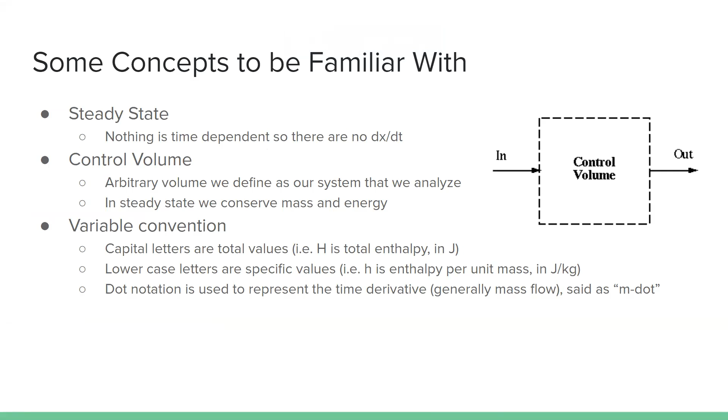The first concept that comes up often is the idea of steady state. Basically, it means nothing is dependent on time; there are no time derivatives of anything. In our rocket engine case, the amount of mass flowing in is the same as the amount flowing out, with no buildup of mass. Same thing with energy: energy flowing in equals energy flowing out, although it will be flowing out in different forms, so you don't have any buildup of energy inside your system. That's basically steady state.

Another big concept used a lot is the idea of a control volume. I don't know if you've heard of systems versus surroundings, that's a big concept in thermodynamics. Basically, you have a system you're analyzing, and we draw an arbitrary volume around it, and everything inside that volume is your system. Everything outside is the surroundings. Anything that crosses that control volume boundary we analyze as mass flowing into or out of the system, energy flowing into or out of the system, that kind of stuff.

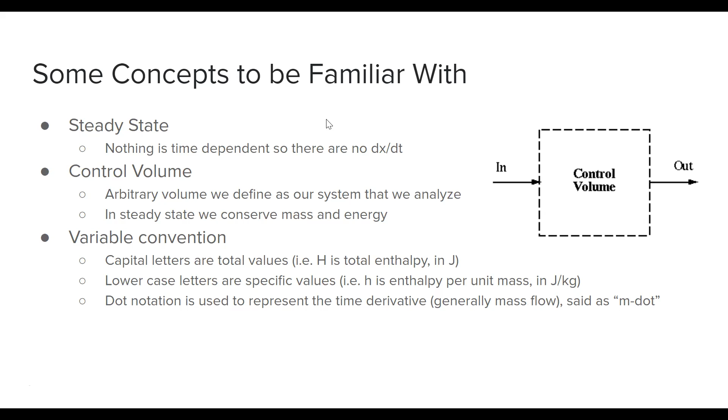And now just some variables that we're going to use throughout this. I'll go through these pretty quick since a lot of them you'll probably already be familiar with.

T is temperature, in most cases using Kelvin. P, capital or lowercase, is pressure. This is one case where specific versus total doesn't really matter - pressure is pressure.

Lowercase cursive v is specific volume. I don't know if you've seen this before - it's basically the inverse of density, where density is mass per unit volume. Specific volume is volume per unit mass, 1 over the density. This is generally used with gases instead of density for some reason.

Rho, which kind of looks like a P in its variable form, is density - again, mass per unit volume.

Gamma, or K, is the specific heat ratio. We'll get into more exactly what that is later. Hopefully everyone has seen this before in the CEA results - specific heat ratio is there in CEA, and CEA calls it gamma. Some textbooks call it K.

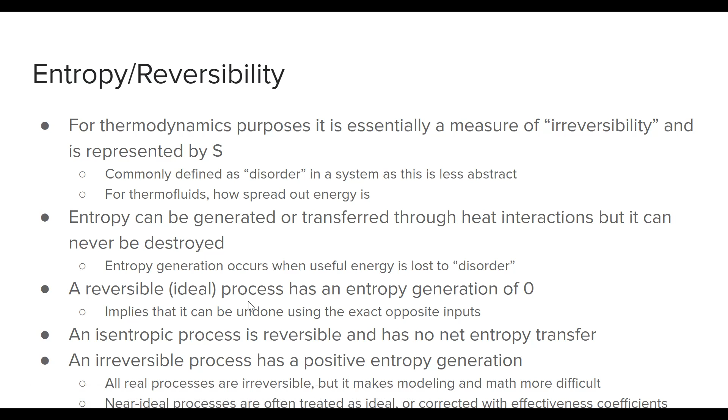In our example of rocket engines, or even just any kind of flow, if you put it through a converging nozzle and then a diffuser - forget the whole rocket engine that accelerates everything, think of it just like water going through a converging and then diverging nozzle. It's not going to be supersonic, but what happens is in the converging section, the water speeds up and its pressure drops, remember Bernoulli's principle, and then when you put it through the diffuser, the diverging section, it slows down and pressure increases. In a reversible process, that pressure will return exactly the same, the velocity will be exactly the same as it was at the inlet. None of that energy is lost to disorder.

I'm going to come back to the isentropic process - let me talk about an irreversible process first. An irreversible process has entropy generation - some of its energy is lost to quote unquote disorder. Visualizing that again with the nozzle and the water, it would be like if you put it through the converging section and accelerate the water, and then put it through a diverging section that's exactly the same, except this time it doesn't return to the exact same pressure or the exact same velocity.

It's a little bit lower in pressure and has a little bit less velocity. The energy has decreased because some of it has been lost to entropy, or disorder, however you want to imagine entropy. So that's just an irreversible process. There is no way we can destroy, quote unquote, the energy or the entropy that's been created. There's no way to go back to that original state unless you do outside work on it.

So with that, an isentropic process is one that is both reversible and has no entropy transfer. That means in an isentropic process, the entropy stays the same. There's no entropy generated and none transferred into or out of the system. These two are kind of like a square is a rectangle, but a rectangle isn't necessarily a square.

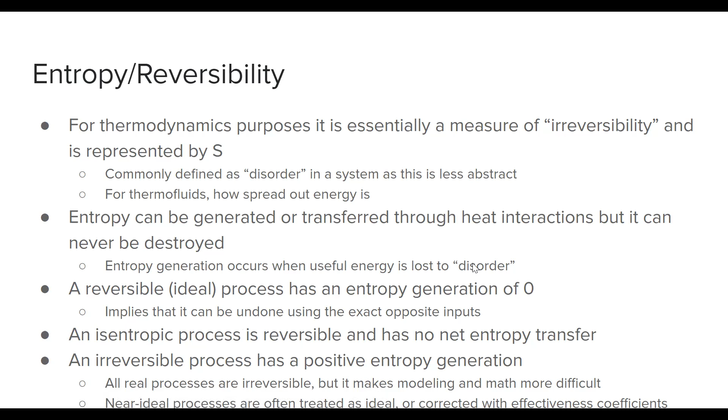We'll get to how that relates to rocket engines later. So, specific heats - I'm sure most of you are familiar with the term specific heat capacity, the variable C. When you're dealing with solids and liquids, that's one value. Specific heat capacity relates the energy with the temperature.

For gases, that concept gets a little bit more complicated. There are two different specific heats: CP, specific heat at constant pressure, and CV, specific heat at constant specific volume. They are kind of as it's implied - CP relates the energy and temperature if you're heating it at a constant pressure and allowing it to expand. CV is the same thing, relating temperature and energy while heating up a gas at a constant volume without allowing it to expand.

So if you remember from the ideal gas law, this would mean the pressure would increase even while the volume stays the same. More specifically - that you don't really need to know, just kind of interesting - oh, I think I skipped a slide. I did skip a slide. We'll just talk about that next.

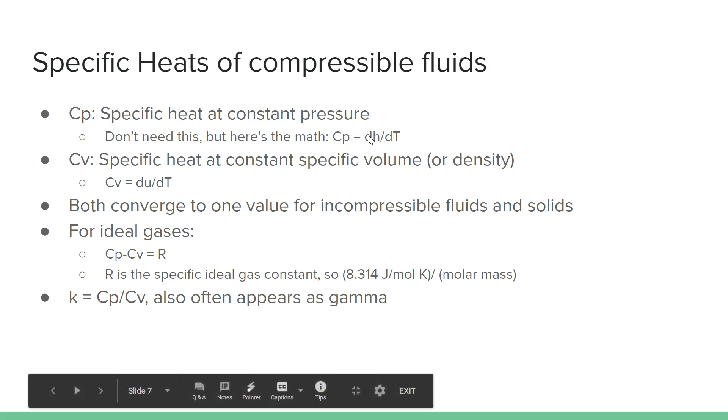So now I'm going to go back to the slide where we talk about the difference between enthalpy and internal energy, because those are very similar and it can be kind of confusing. Internal energy, as it implies, is the amount of energy that's contained in a system. Now that amount of energy is fairly arbitrary - we have to define that relative to a reference state.

That reference could be anything you want realistically, but most commonly you'll see it referenced to 0 degrees Celsius or 0 Kelvin. 0 Kelvin is more ideal because if you reference 0 Celsius and you have something below that, you can actually have a negative energy, which is kind of weird to think about. But energy is just defined relative to a reference state, so it is possible. 0 Kelvin is absolute zero, which means if your reference state is 0 Kelvin, energy is zero, and you cannot have any negative energy there because absolute zero temperature also corresponds to absolute zero energy.

So enthalpy is a slightly different way of measuring the energy in a system. It's defined as internal energy U plus PV. Remember, I said earlier that in thermodynamics we define work not as force times distance, but as pressure times change in volume, which if you think about it is fairly similar. Pressure is force per unit area, and volume is kind of just like distance times area, if that makes sense.

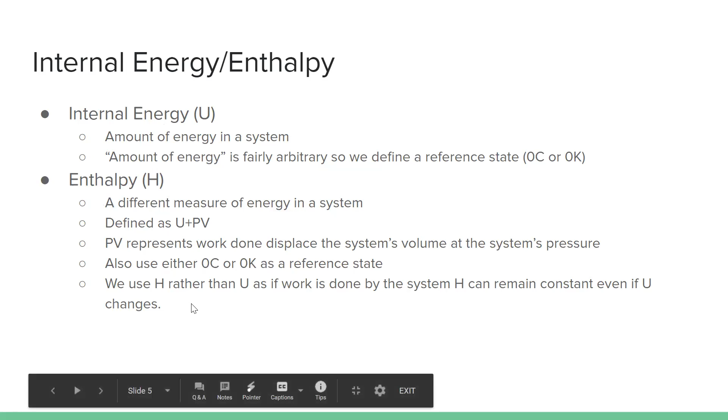All right, I think that's it for the kind of background on thermo slides. And now we can actually get into how this relates to rocket engines.

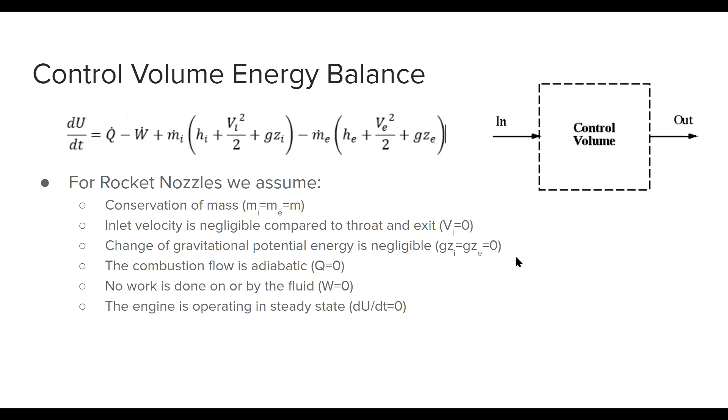So we can arrange this to say that H1, H inlet, minus H2, H outlet, equals the kinetic energy term at the exit. So basically what this means is enthalpy in minus enthalpy out is the kinetic energy of the exhaust gases.

Basically, the rocket engine takes the large amount of enthalpy from combustion gases and turns that into a large amount of kinetic energy of the exhaust. And that is the main function of the rocket engine.

We want to maximize this term and minimize this term. And from the combustion side of things, we want this term to be as high as possible. Yeah, so that's basically what a rocket engine does.

But now, how do we get these terms here? What do I have next? Yeah.

Basically, H1 comes from a lot of chemistry. I don't know if in your chemistry classes you've done combustion stuff and reaction stuff and heats of formation and all that good stuff. But I'm not going to get into the specifics of that per se, just more like the thermodynamics of it. CEA starts by doing a bunch of chemistry to find this H1 value.

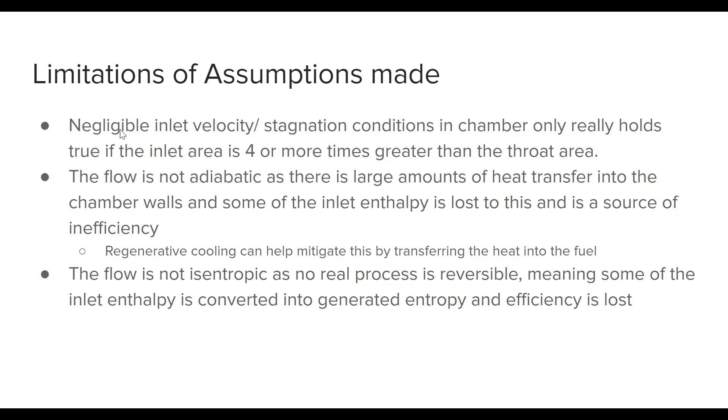So anyway, the first assumption that we made is that the inlet velocity was negligible. If we go back to this equation, we assume the inlet velocity was negligible. And also because we assumed inlet velocity is near zero, we said that we can assume stagnation conditions in the combustion chamber when we're doing these equations.

So in general, that is a good enough assumption, provided that the flow is going slow enough. And that is actually something we can control using the chamber cross-sectional area. We'll get to it in the next lecture, but in fluids there's a thing called the continuity equation. I'm sure you've all heard of it: m dot equals rho AV, mass flow equals density times cross-sectional area times velocity, and that stays constant throughout any kind of nozzle.

So, increase the cross-sectional area, we can decrease the velocity in the chamber. So that is where we got the parameter for the ratio between throat area and inlet cross-sectional area of the combustion chamber, where we got that 4 or greater. 4 is kind of the lower limit of where this assumption is accurate enough that we can use it. Anything above that is going to be more accurate until you get to a certain point.

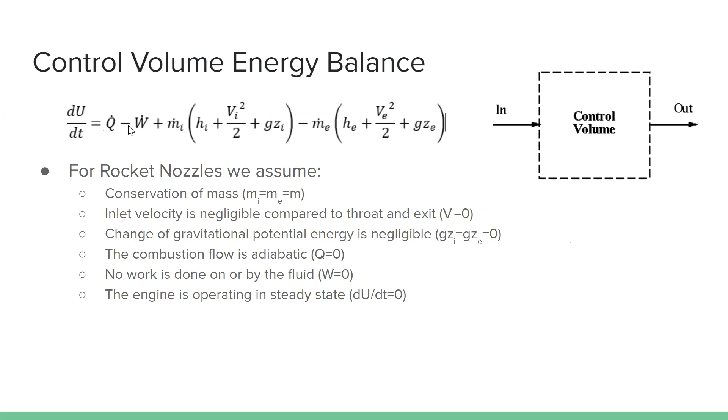So they would show up as a plus Q dot here that takes away from this velocity term. Using that assumption means that in reality, when we go to test this, the exit velocity is going to be a little bit lower than we expected. We're not going to have quite as much thrust as we expected, but that's okay. That's all in the design process.

Trying to calculate that Q out, as you saw in that lecture, is fairly complicated, and it's much easier to just assume that Q out value is zero and deal with a little bit lower efficiency than we were expecting. That being said, one way you can mitigate that is using regenerative cooling.

As we talked about during the heat transfer lecture, regenerative cooling is basically cooling with the fuel before it gets injected and combusted. So what you're doing is the heat is transferred out of the combustion flow, into the walls, and then carried away by the fuel, which increases the enthalpy of the fuel before injection and increases the enthalpy post combustion too. It carries that with it through the combustion process. That's why regenerative cooling is known as regenerative cooling.

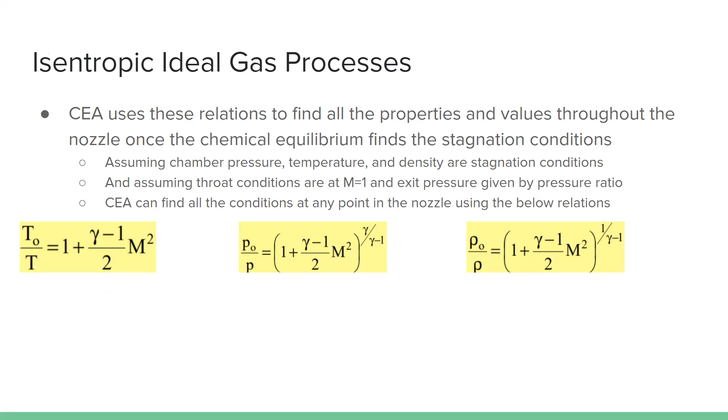And the last one, another big assumption: if we're using the isentropic ideal gas processes, we're assuming that the flow is isentropic. In real life, nothing is isentropic. You can get close to it, but you can't quite get it. So remember, I was saying in an isentropic flow, you would have a converging section of nozzle. It would accelerate the gases, bring down the pressure, bring down the temperature.

You'd be converting this enthalpy into velocity energy. And then in theory, if you're doing this before the throat, if you expand the flow again, you'll turn this velocity energy back into enthalpy.

But we have a thing called entropy and disorder. There's another term here. Some of that enthalpy energy, when you put it through the converging section of the nozzle, some of it's going to go to velocity, some of it's going to go to entropy. And entropy cannot really be recovered. So when you go to turn this back into enthalpy, it's not going to be quite the same enthalpy.

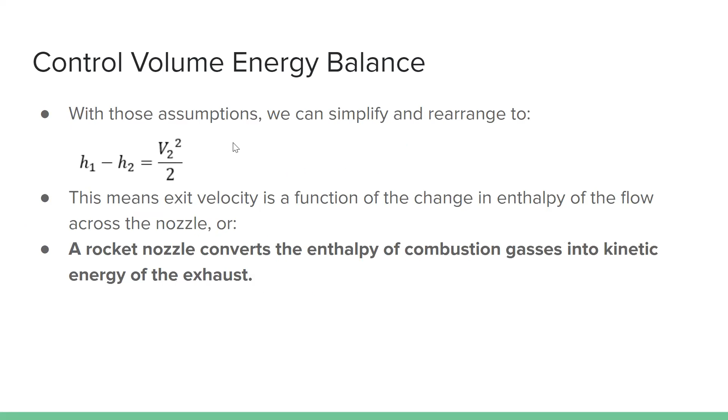It's not going to have quite the same temperature, not quite the same pressure as before, and you can get less energy out of it. So again, just like with the heat being lost, some of that enthalpy is not going to be turned into useful kinetic energy of the exhaust gases. It's just going to turn into entropy, random disorder, and your exhaust velocity is going to be slightly slower than you calculated, and you're going to get slightly less thrust than you calculated.

But the process of calculating entropy—I actually don't even know if there is a way to estimate the entropy that will be generated. I think you just have to measure the actual and compare it to the isentropic assumption, and then figure it out that way. So we just assume isentropic because there's no easy or possibly no way to account for those losses. It's easier to just assume it's isentropic and deal with the losses later.

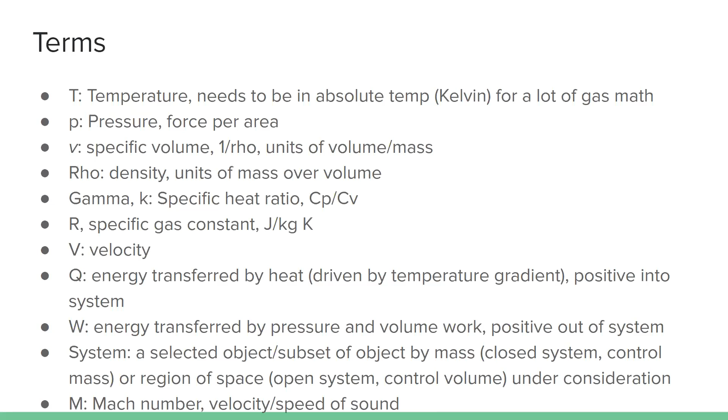All right, so that is part one, all about thermodynamics and how they relate to rocket engines. Again, don't worry if some of this went over your head. That's completely fine, this is really dense material. It might take a few watchings to get, and taking our Northeastern's course on thermo in order to understand that. That's fine, I certainly didn't understand this the first time I read it in a textbook. But hopefully, the way we've presented it here has made it easier to understand than just reading the chapter in rocket propulsion elements.

On Thursday, we'll be doing part 2 on fluids.